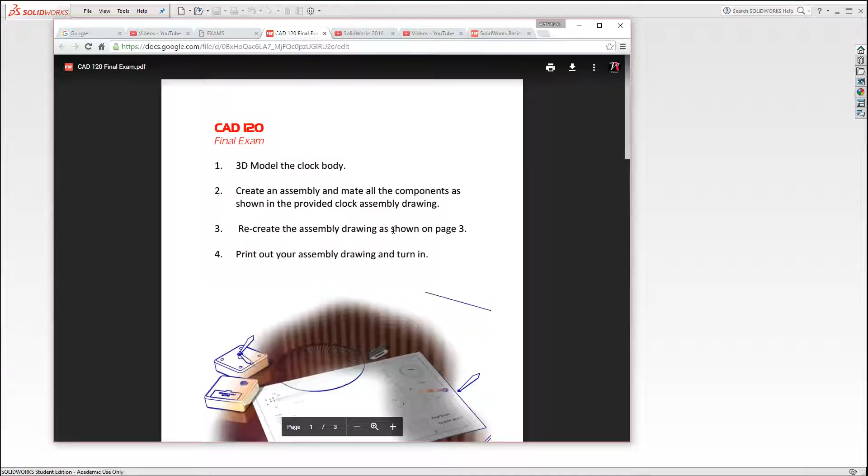SolidWorks 2016 Basics Final Exam. In this exam, basically you could go to the vertanu1.com webpage, and if you go to SolidWorks Basics Final, you could bring up the PDF file, and here you'll see it's broken into 4 segments. First, model the clock body, then create an assembly, mate all the components, then recreate the assembly drawing, print it out, and turn it in.

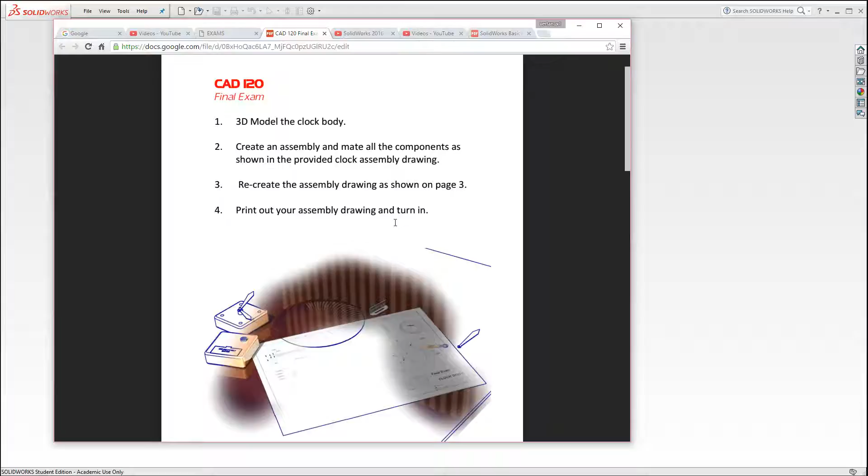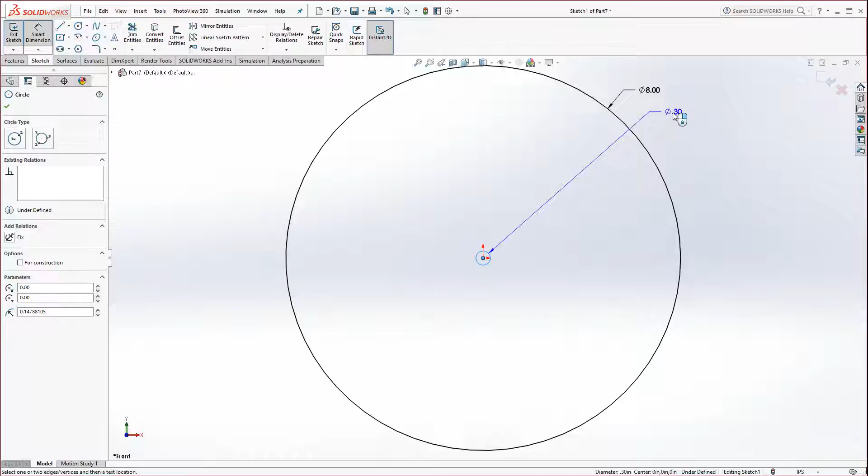So let's begin first of all by designing the clock body. Start a new part file and go ahead and sketch this on the front plane. Draw 2 circles from the origin, a big one and a small one. The outside diameter, or OD, will be 8 inches. The ID for internal diameter will be 0.5. Extrude these 0.25 deep.

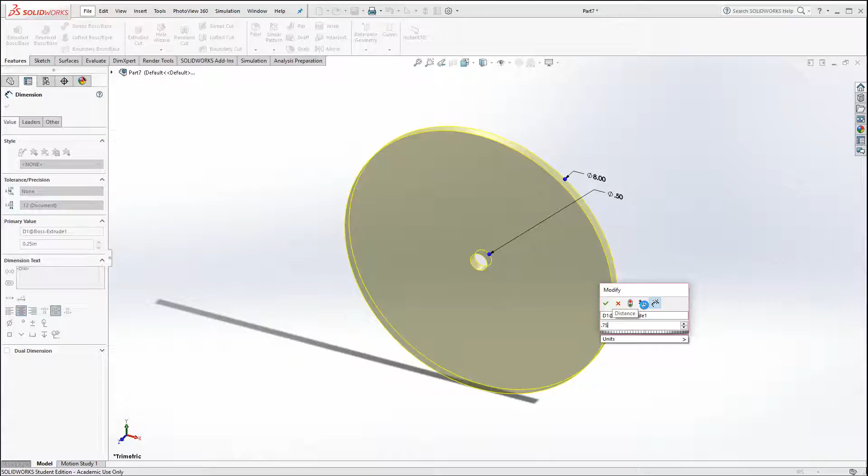And actually, I believe I'm wrong on that one. The depth for this one should actually be 0.75. So I can just double click, find that blue dimension, 0.75, rebuild. Okay, go ahead and don't forget to put the fillet on of a 0.25 right on this edge.

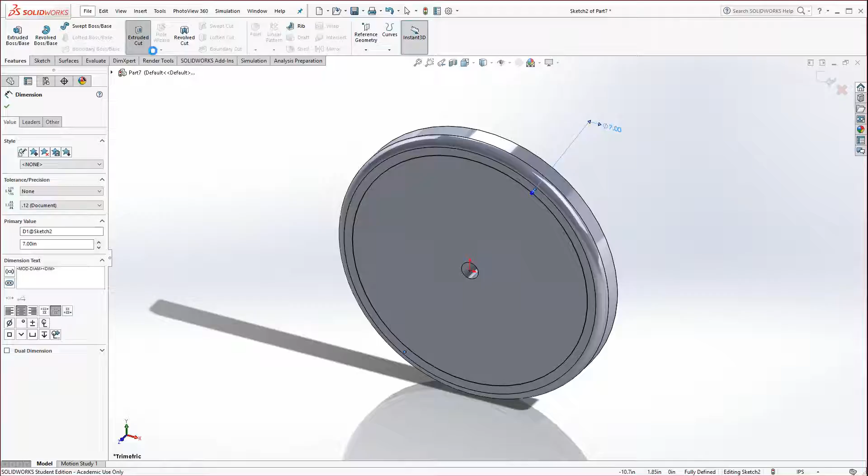Now select this face, start a sketch. Take the circle tool and at the origin drag out this next circle. And the reason for this one, this is the recess for the lens to sit on. And so this is 7 actually. And that gets cut 0.125 deep.

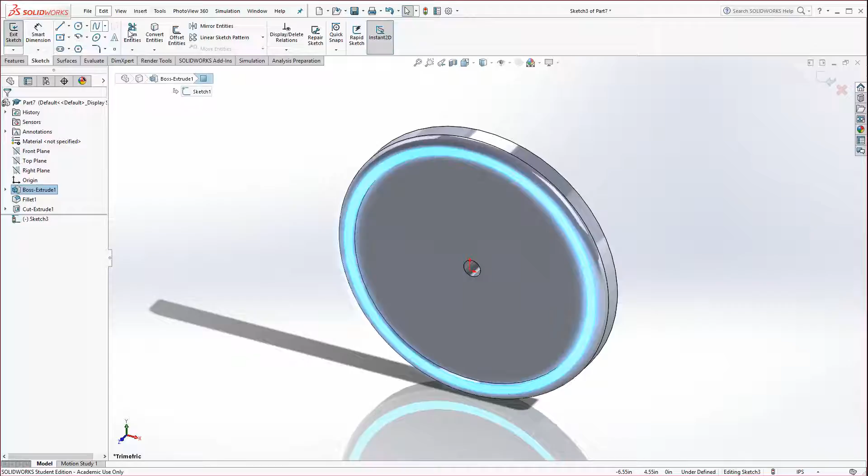The next one, if you're looking at the print, you could either do the math and do the subtraction of 0.125 from the value given on the ordinate dimensions, or just select this face right here, this little face, start a sketch. That way you don't have to worry about the subtraction. And at the origin, drag out another circle, and this is the recess that's going to have the digits on it. And this is 6.5. And then that gets extruded a 1/2 inch in depth.

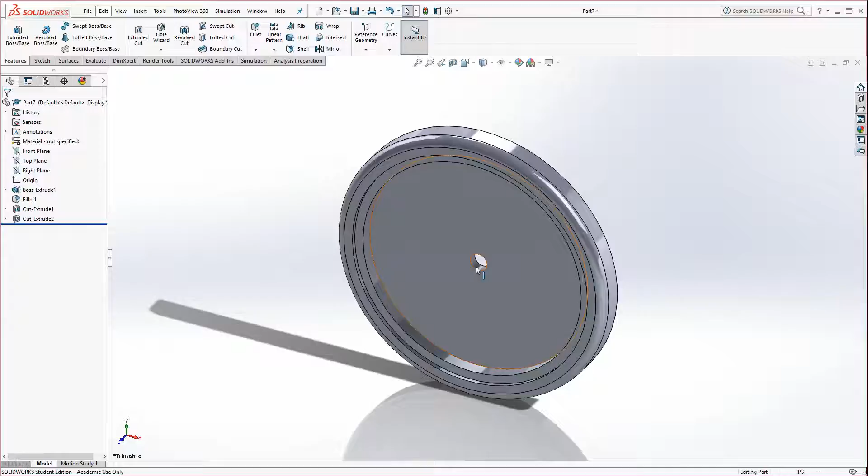Now on that floor, select this face and start a sketch, and we could go normal to and draw the 12 o'clock digit, which is just a circle, and it's going to be a diameter of 0.375, and it's going to be positioned 2.5 inches from the center of the clock. And notice it's still blue, so just Control select both centers and make that vertical so it's aligned. Otherwise it could move left or right. And now extrude this 0.1 deep.

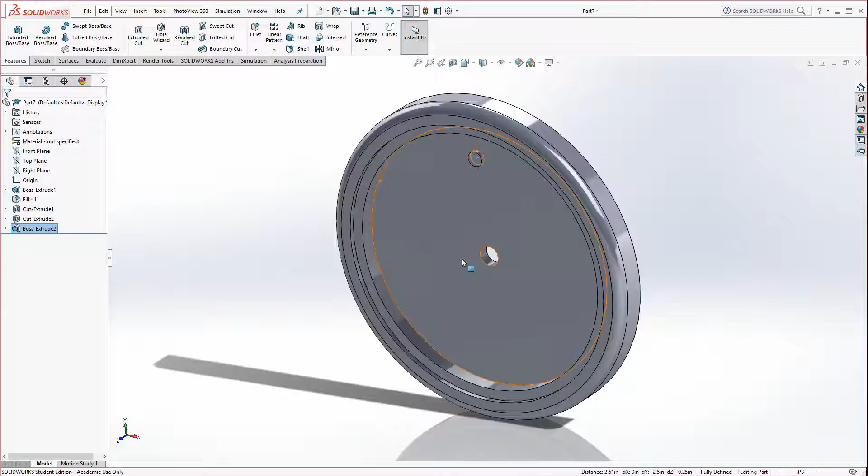Now with it still selected, we could go underneath linear pattern, find circular pattern, and select this little box up here, select the outer face, and then make sure equal spacing is selected, 360 degrees, and 12 instances, because we need 12 digits. Hit the green check.

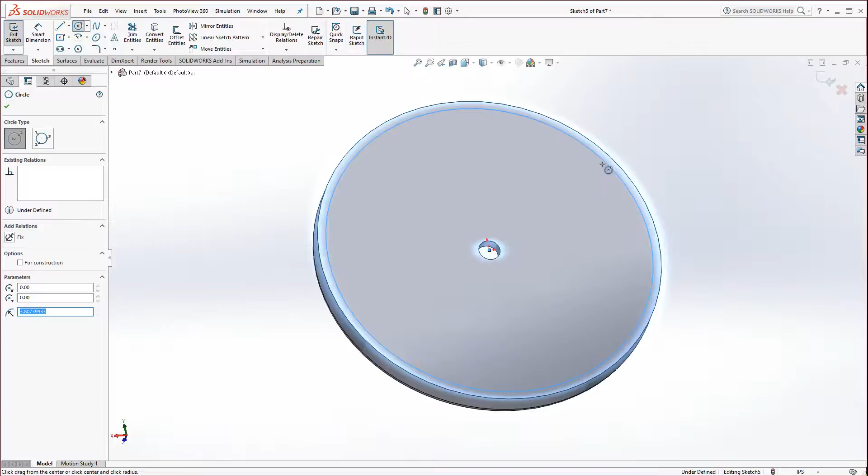Now flip it around the back, select this face, and start a sketch. At the origin, drag out a larger diameter, and this is going to be 7.5, because there's going to be a recess on here. And then extrude cut that a depth of 0.125. And from here, now select this face and start a sketch, and we need to put in some bosses to hold and position the chronometer.

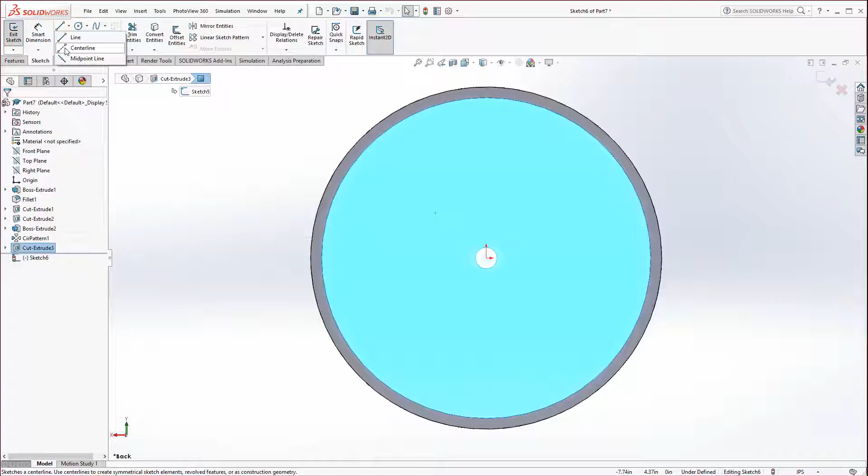Okay, in this case, draw 2 center lines, a vertical and a horizontal, and then draw a circle floating right here. Dimension the circle at 0.25 in diameter, and then dimension it to each center line 1 inch. Be careful not to cross over the center lines, or else you're going to get it twice that.

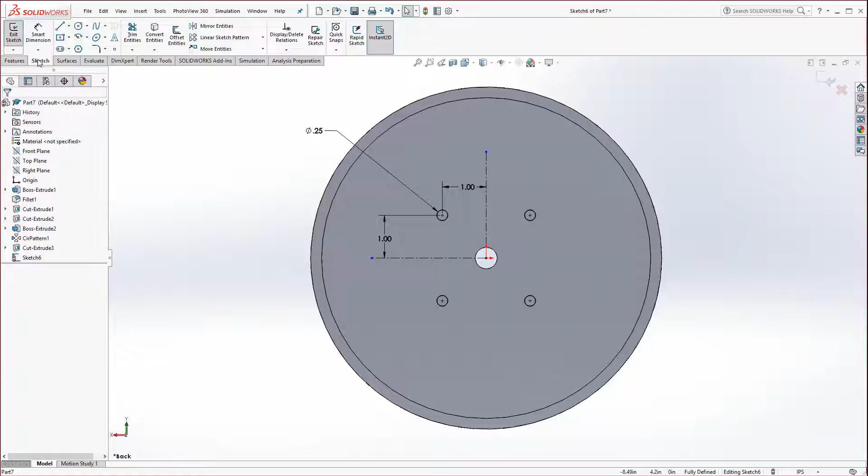And now we could mirror that. Just click and drag a fence to surround at least one of the center lines and a circle, and mirror entities, and do the same over here. Click and drag, selecting one center line and the 2 entities, and click on mirror entities. Now we could extrude that, go to features and extrude, a depth of 0.25. Go ahead and save this. The bezel is now complete.

And so now that we have that completed, let's go ahead and bring it into a new assembly. So go to File, Make Assembly from Part. Go ahead and just hit the green check mark. It will drop it into the origin, matching up the origin of your part with the origin of the assembly.

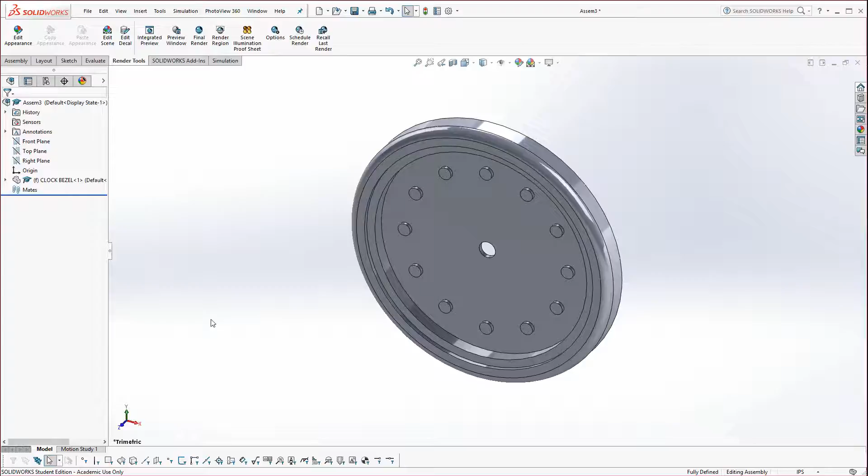Now you just need to go to the Vertanux1 web page and go to the part files. And here you'll find the final exam parts. Go ahead and select that, download them,

and once they're loaded up, just click on this little arrow and you can show in folder, and go ahead and just double click on that, the SolidWorks there, and select the parts. In there is a Word document which you don't need, and just cut those out and paste them out here, or someplace where you know you're going to be able to find them.

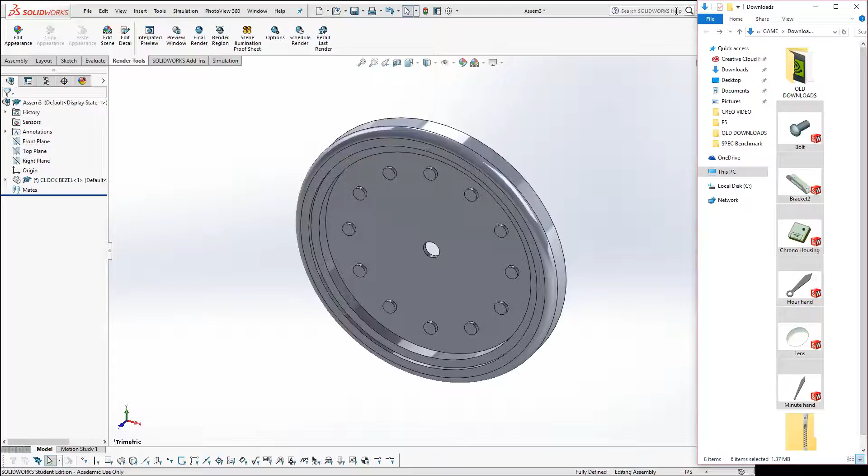And I'm going to make those a little bit easier and larger to see. And there we go. So what we could do from here is we could use this, as we learned earlier, as our method of dragging those parts in. So I'm going to go back to SolidWorks here, bring this up. Could actually truncate SolidWorks a little bit and then fit this over here. Oops. And now this way we could go ahead and just drag and drop these in as we please.

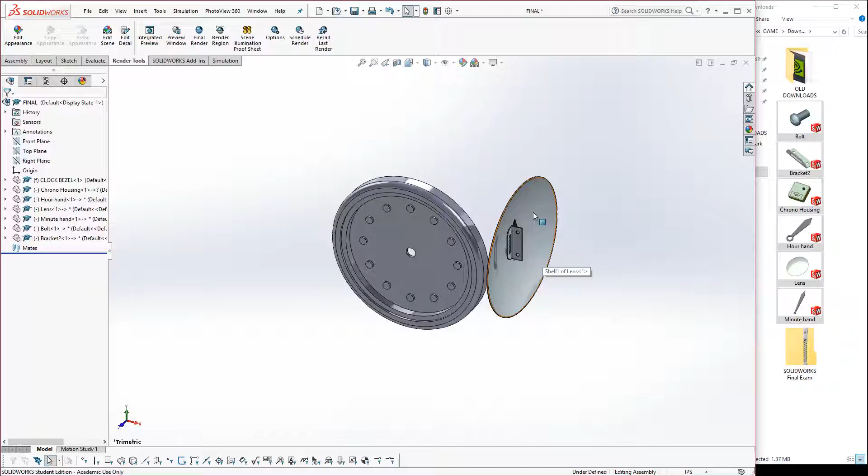Now I'm going to save the assembly just to be on the safe side here, and I'm just going to call it Final. And now the first thing I would recommend bringing in is the chrono housing. Just drag it right in. Oops, all of them were selected, so it dropped them all in, which is fine. I'm going to actually see if we can undo that. Unfortunately, it's not working. So normally you can keep these in here. I'm just going to delete them, because not everyone's going to drag them in at once like that.

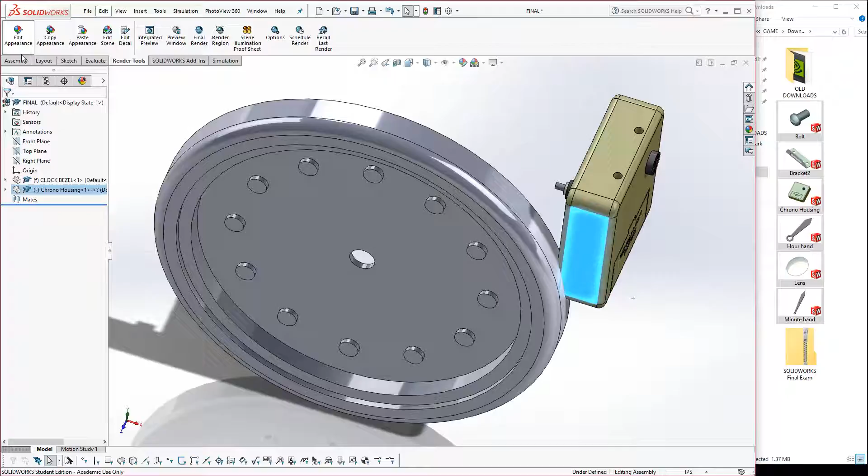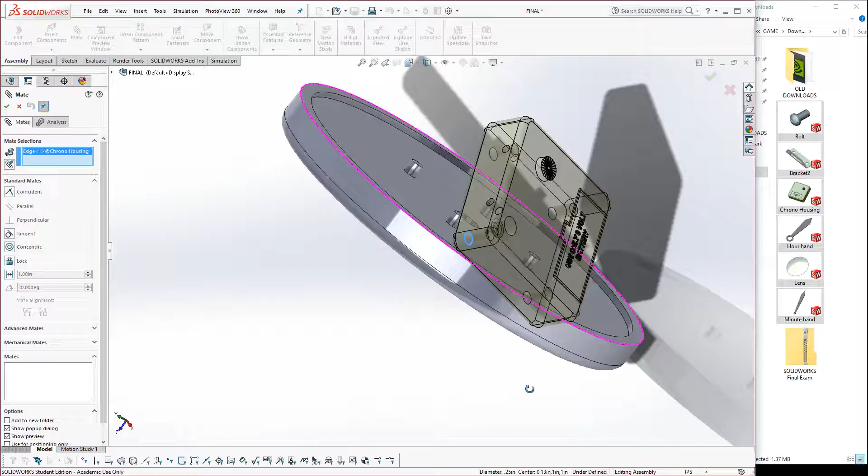Okay. Now what we need to do is we're going to go ahead and orient this. You see we could rotate it. I would go to the assembly and just rotate this a little bit. Under Move Component, go to Rotate, and get it so that it looks somewhat in the direction of how it's supposed to be in. These holes should be facing up, because that's where the mounting bracket is going to be. So let's go to Mate, and you could select this edge here and get the upper right corner edge of the bezel. Lock that in, and then to line these, select this face to this face here.

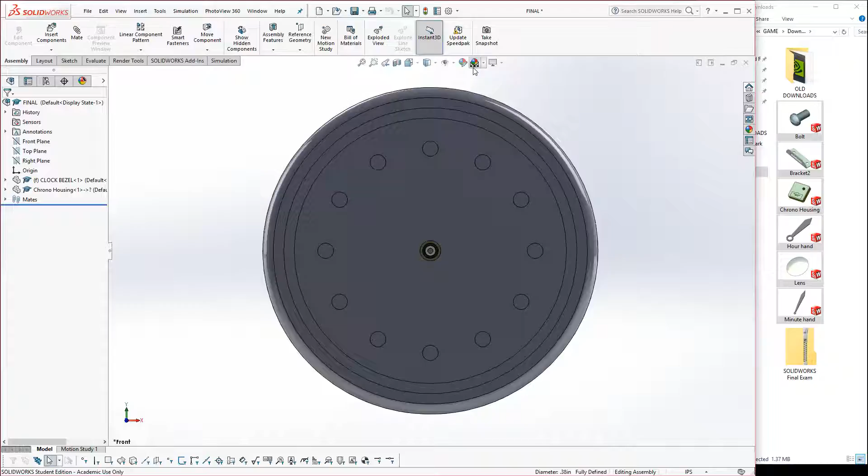And just to be on the safe side, I usually recommend hit your space bar, go to the front view orientation, and maybe just go to wireframe for a moment and make sure that those little holes you can see are pointing up. If it doesn't look right, delete it, drop it back in, or if you're more fluid with the software, feel free to edit it.

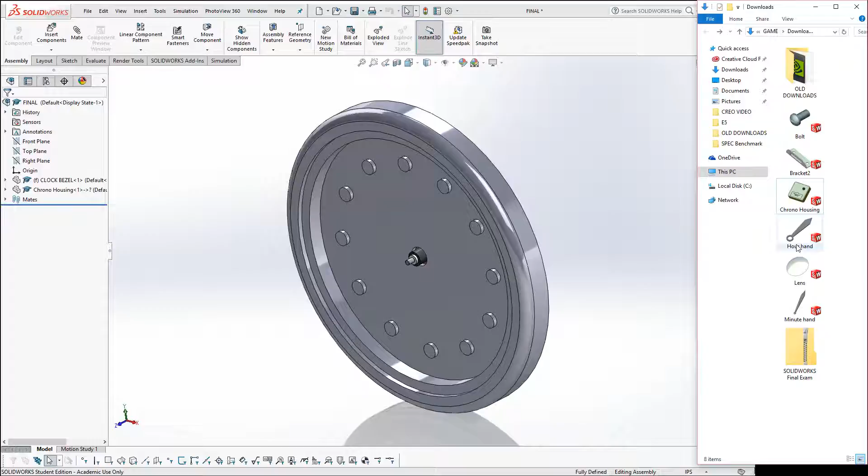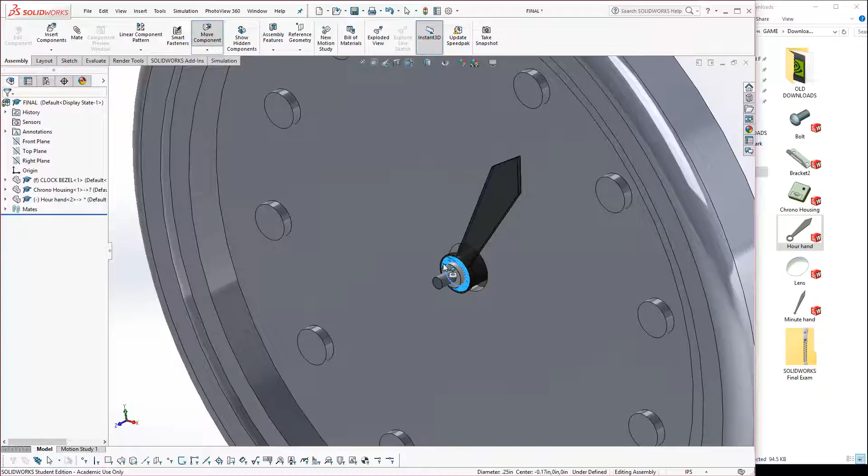Okay, now we could go ahead and bring in the next component here. I'm just going to deselect these. I'm going to first bring in the hour hand, and get it near or close in proximity to where it belongs. And here's a little trick, as we learned before. If you hold the Alt key and drag this over, you could actually get it over to this edge and get it on the edge that you wanted to. And the only bad thing, sometimes the Tab key used to pop it in or out, which it doesn't do that. It never really did pop it in. Oh, there, it actually did get it in. Okay.

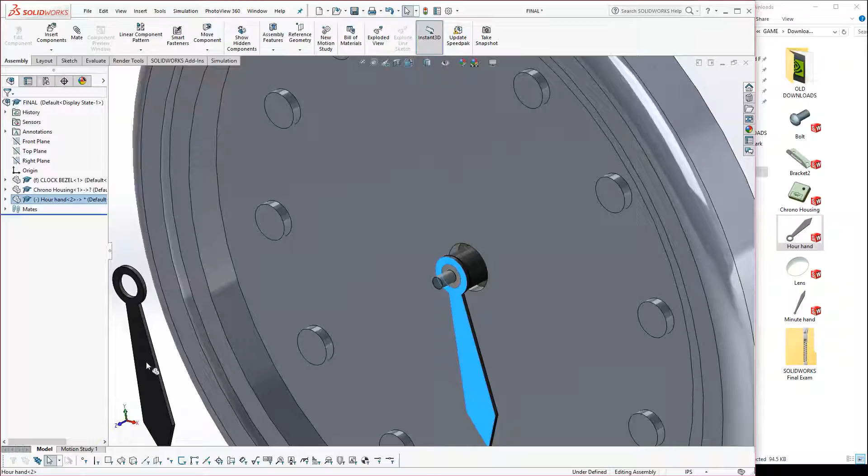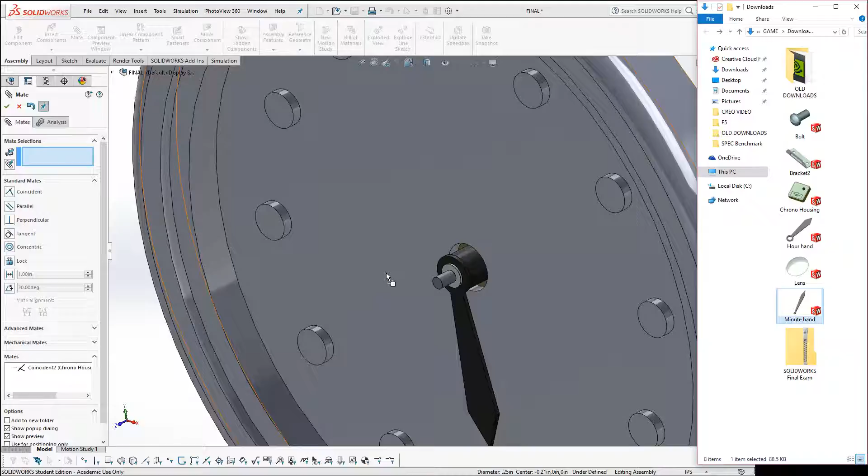Otherwise, if you wanted to do this, let me just show you another method here. I'm going to drag off a copy, and I'll delete that. You could do it individually. Go to Mate, select like this edge to the edge between the two contrasting black and white sleeves, and hit the green check. Okay, let's bring in the next one, the minute hand. Just grab that. Oh, in order to do that, cancel out of the Mate tool first.

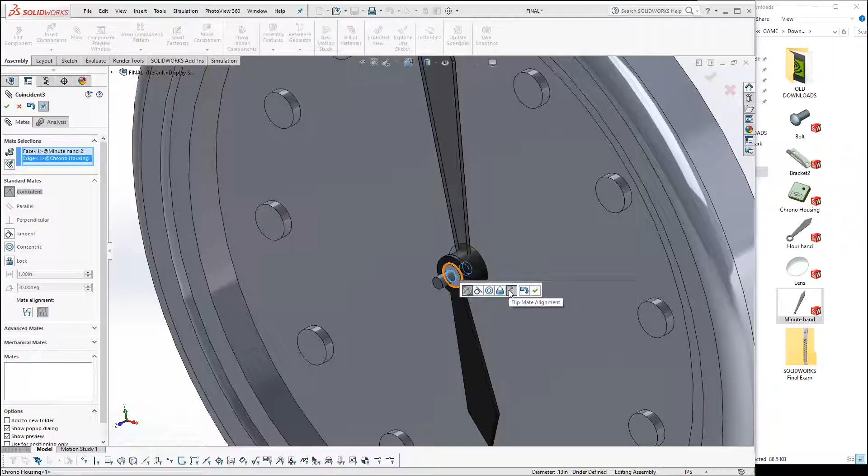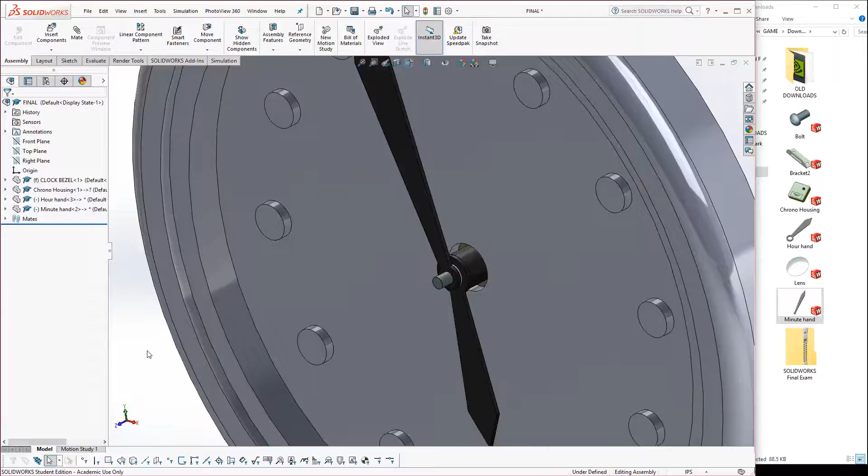Hit apply. Now we could bring in the lens, drag the lens in, and the lens, you could just go to mate, select this inner edge if you zoom up, or the outer edge actually on the back, and then select this edge right here, and then you'll have to flip it so it's facing outward. Hit apply.

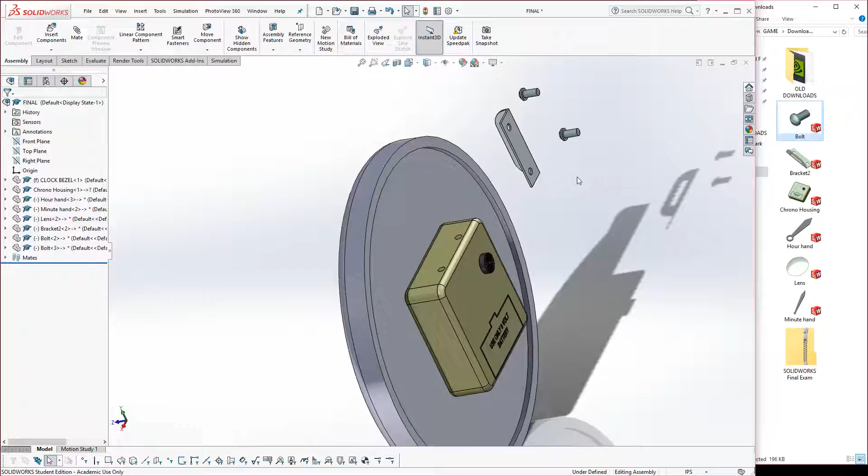Okay, now on the back side, we want to bring in a bracket, drag the bracket in, and if you want, you could bring in a couple bolts too. We'll need 2 of those. Now let's see if we could Alt drag this over.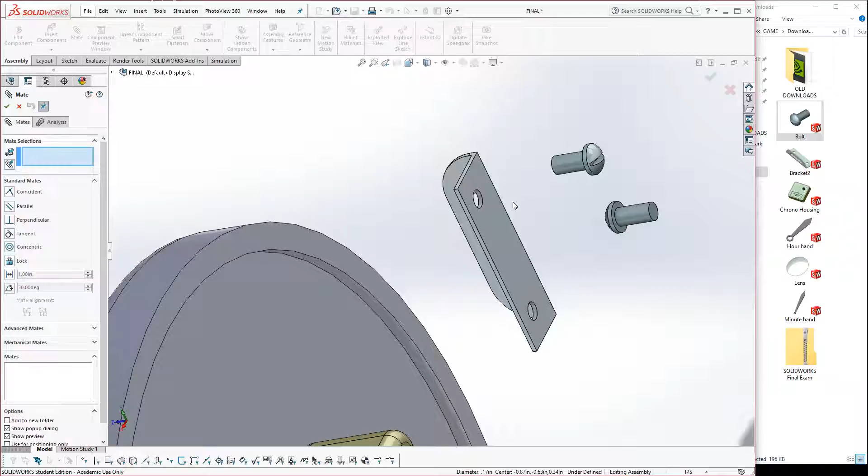And unfortunately, oh, there we go. It's not getting in there. You know what? I'm not going to do it. I'm just going to go ahead and mate these. Let's mate this first. Select this edge here and make sure you find the proper edge for it to mate to. Flip it if you need to. Hit apply, and then get this edge to mate up to this edge here.

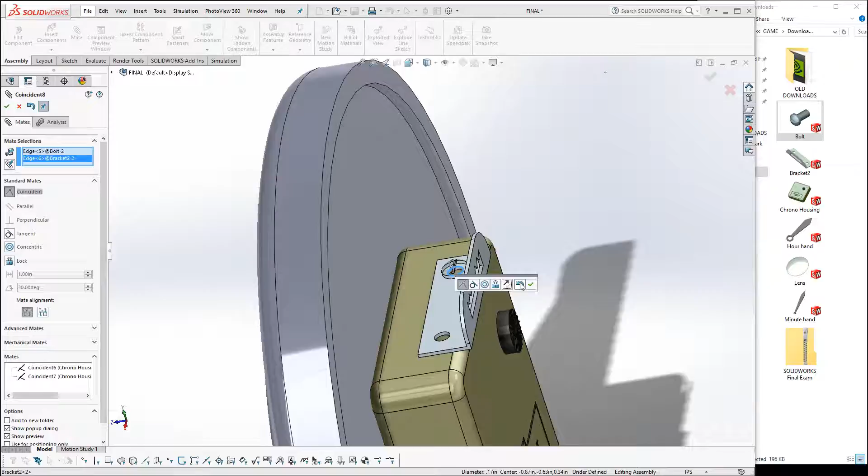So there's like a dozen ways you could do this. I'm just showing you several ways. Just trying to show you some quick ways. They're not always useful though at times. Okay, I'm going to mate that. The green check. And then I'll get this one over here. Select that edge

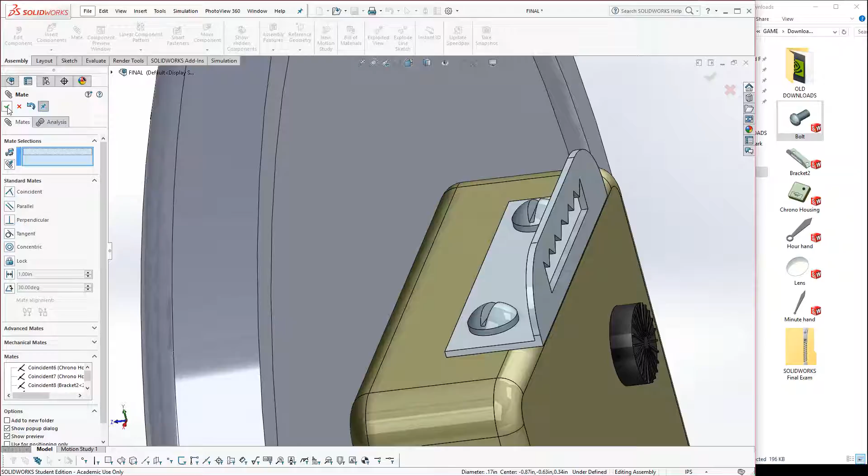right here. Now the edges really, when it's concentric, only work if they're line to line, meaning that they're the same diameters. They don't always work. And then I think in 2017 there was some talk of maybe that doesn't need to be line to line anymore. Can't remember what's new, but I thought I saw something on that. Might be wrong. Okay, but anyhow,

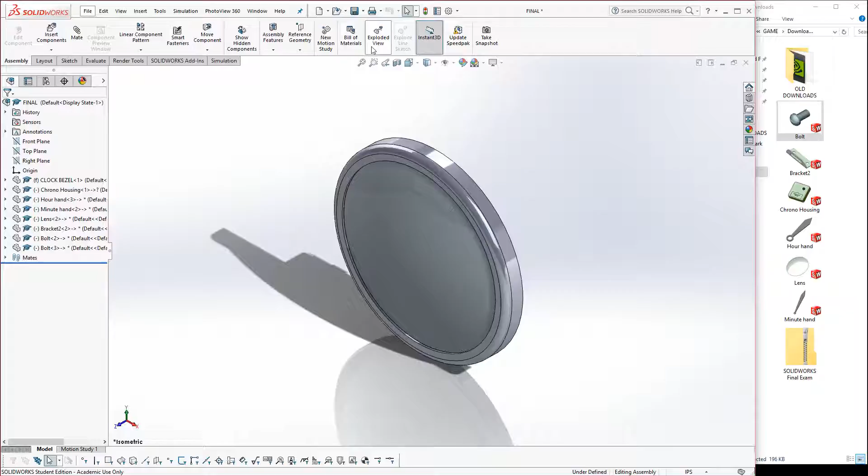now that that's complete, let's go to an isometric, and you need to explode this now for the drawing. So at this point, make sure you're in isometric, go to exploded view, click on the lens, drag it forward, give yourself enough space for everything else. Click on the minute hand, drag that forward, make sure nothing's touching. Notice I'm in isometric, and you don't want anything contacting it.

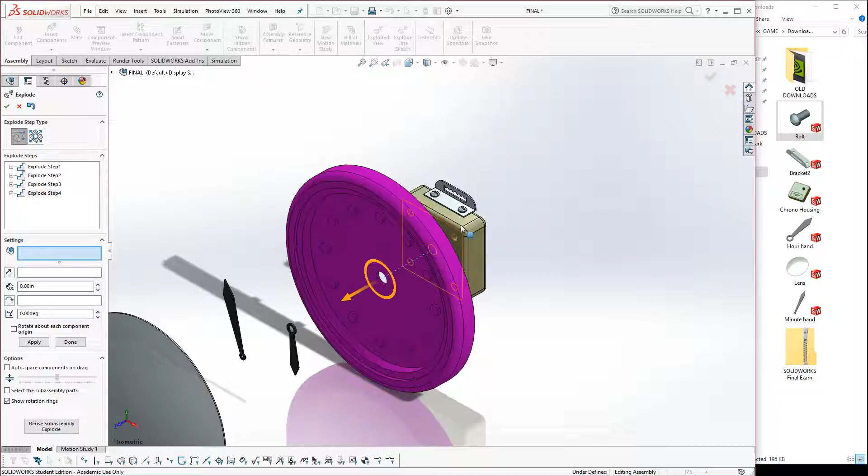But yet again, you don't want everything right on top of each other or too far away from each other, I should say. Okay, I'm going to click on this, and I'll click on the other components along with it, and just drag that backwards. Now I'm going to click on this and the 2, oops, didn't want to click on that. Now that's going to rotate it. Don't want that. Drag that up, and then click on this part and drag it down.

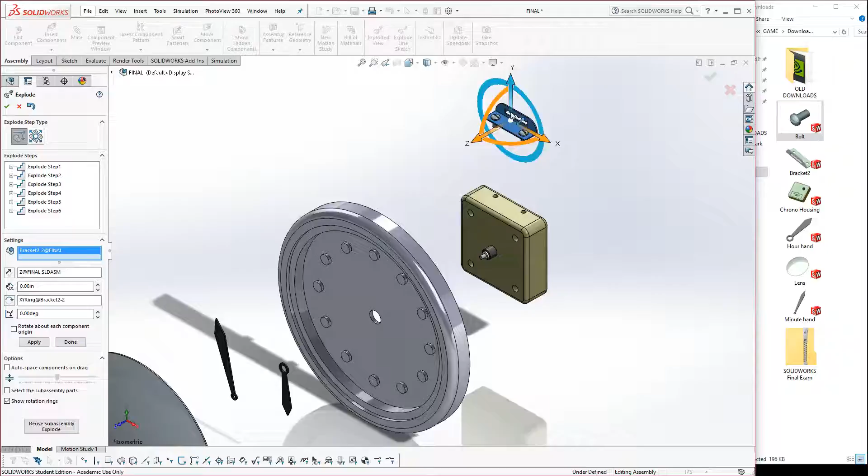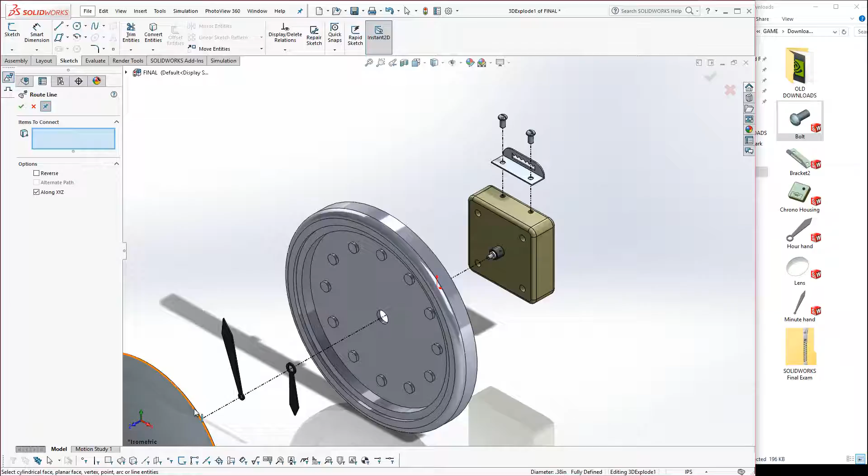Hit the green check. Now you could go to exploded line sketch and select that face. Make sure the arrow points down. Select this edge, green check. Select this face, make sure the arrow points down. Select this edge, green check. And select this face, make sure the arrow points that way. If not, click on it to this edge, green check. So now you have the exploded lines in there.

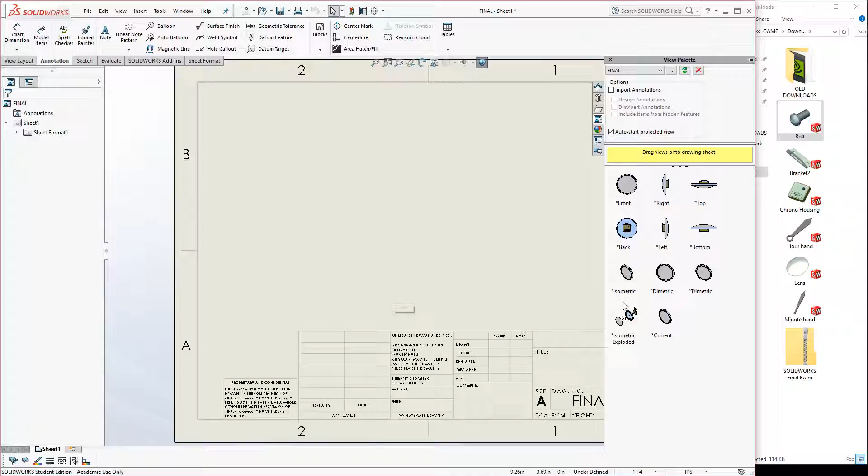And now collapse it. Right click and collapse. Save it. Save all. And now we could go and make a drawing. So we go make drawing from assembly. Go with the ANSI landscape. Drag in the isometric exploded, drop it in right there. Go ahead, feel free to shade it with edges.

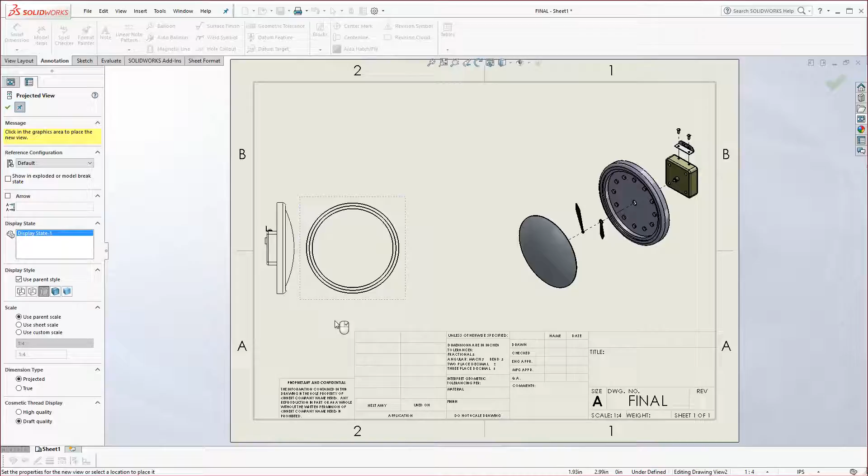And now bring up the little view palette. And actually we could expand this again. We don't need that explorer anymore. And I'm going to drop in a front and a left, a bottom, and hit escape. Now these 3 views should be hidden lines. Okay. Now make a section view. Oops. Let me go back here. Control and Tab allows you to toggle between them.

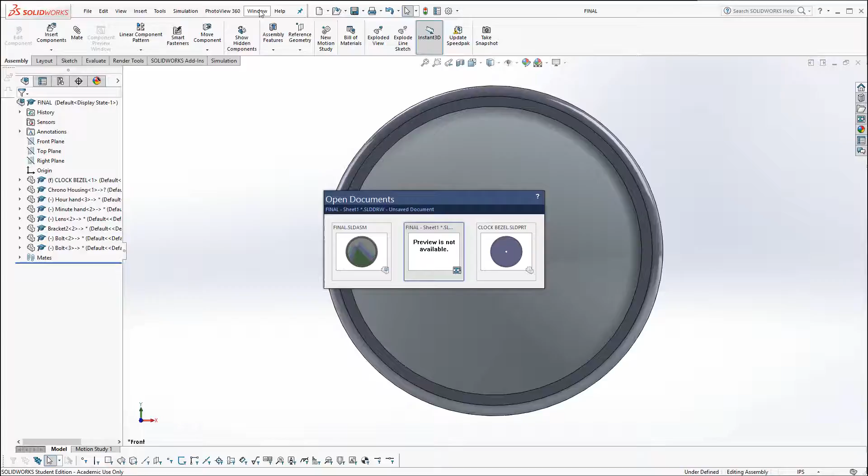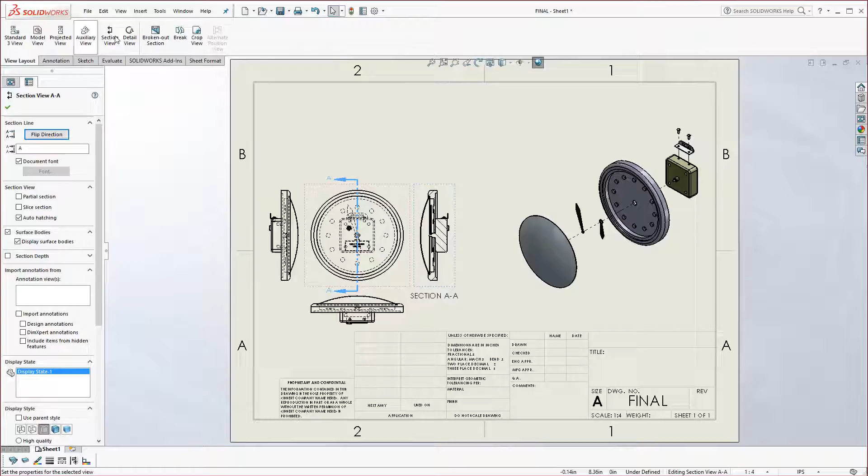Okay, so now we want to make a section view. So go to View Layout, Section, click right in the center, hit the green check, and make sure auto hatching is checked. Just click over here to drop it. Now go to the detail view, and I want a detail view of this little region here. Drop it right up there.

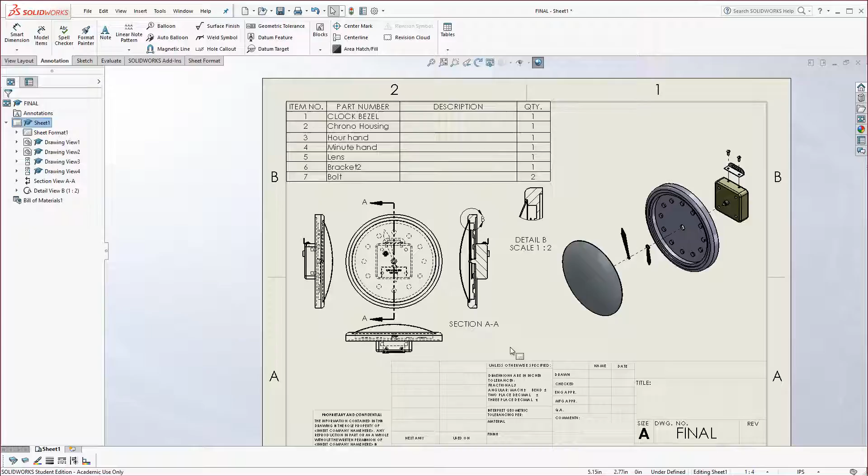Now click on this view, go to the annotations and tables. Select bill of materials, green check, drop it in right up there. You could grab the bottom and kind of squeeze it together, make a little bit more room. Let's move this out of the way. Make sure nothing's overlapping or contacting, no sloppy sketches allowed. Go to balloon, and let's add the balloons for these.

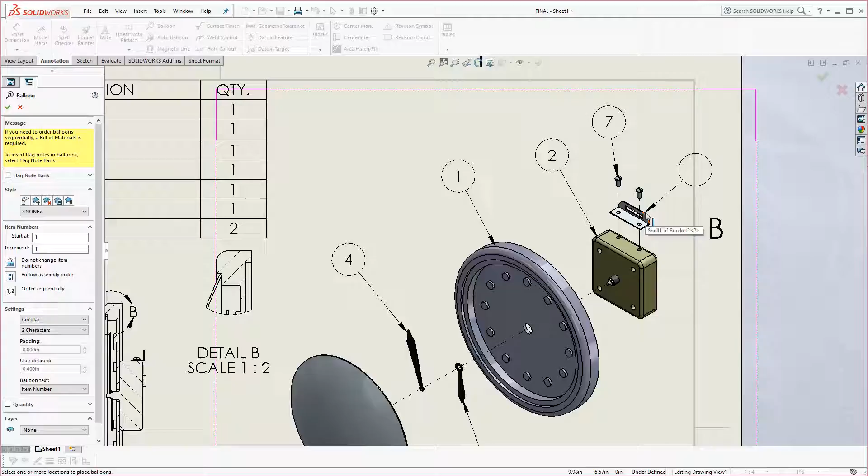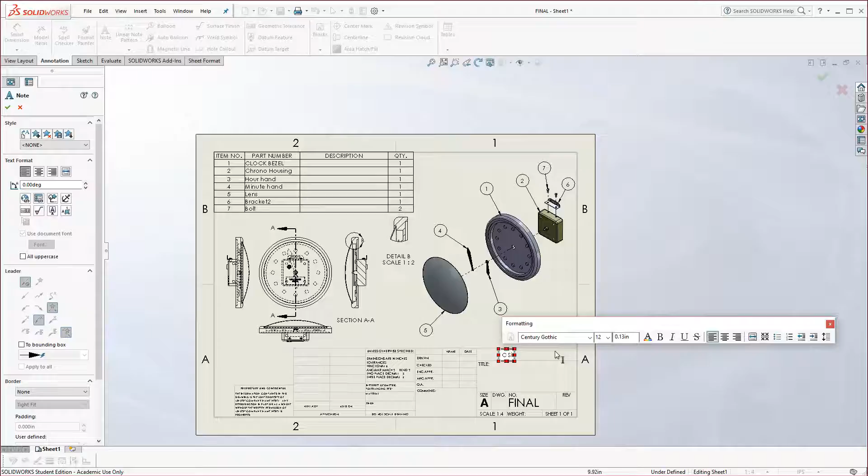Okay, make sure there's nothing overlapping. I don't want to see stuff like that. That will get marked off. Okay. And don't forget your name. Go to note. Just drop it in here. No initials, please. Make sure you put your entire name on there. We have a lot of people with the same name. At least same first name.

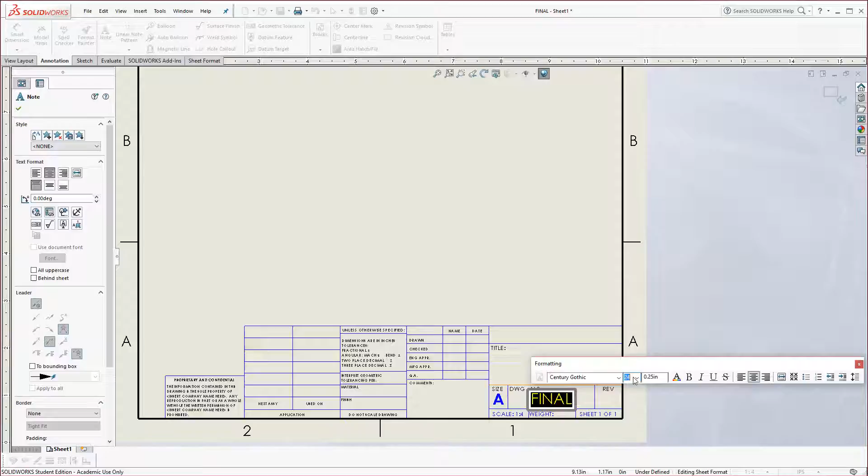Okay, and also, if anything is overlapping down here, remember you could right click and edit the sheet format and double click on that and change the actual font size to fit it. That one didn't need to be fixed, but I'm just showing because it's very common when you go to edit sheet. And then you just go to print and print it out, turn it in, and it'll be graded at that point. That concludes the final exam review.